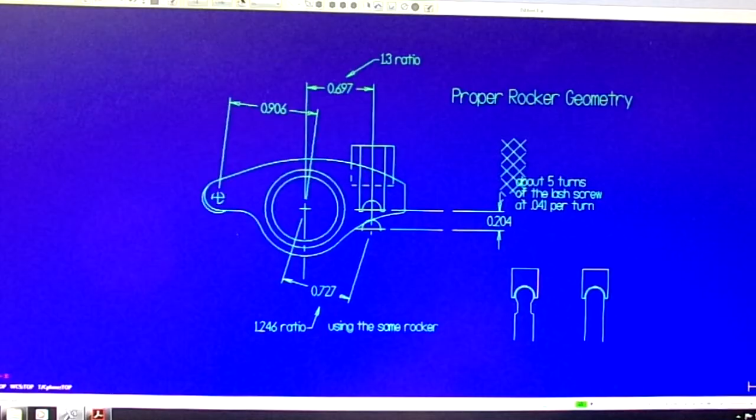So first I want to talk about the ratio of the rocker and how you can inadvertently change the ratio by misadjusting the lash screw. Now the ratio is created using this fixed number, which is a dimension from the center of the trunnion to the center of the roller. In the GX200, that happens to be 0.906.

And in this particular case, I'm using a 1.3 rocker geometry here, which means the distance from the center of the trunnion to the center of the ball on the push rod needs to be 0.697. That gives you a full 1.3 ratio.

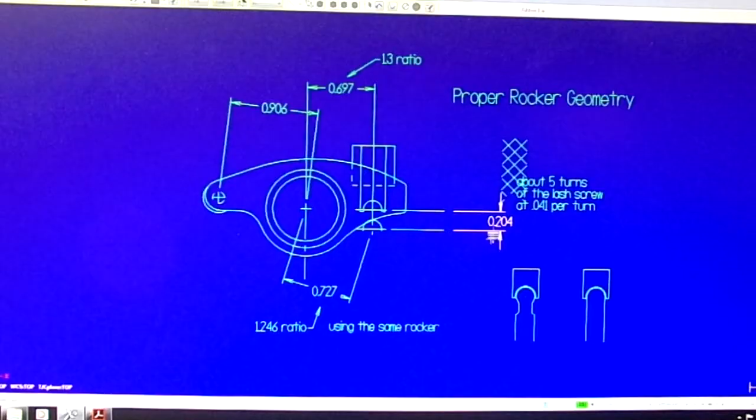Now, if your push rod is too short, you have to run this screw down. You see this piece of geometry here? If you run the screw down to this level, which is about 5 turns of the screw, that'll bring you down another 204 thousandths. So if your push rod is 204 thousandths too short, this lash adjusting screw is going to end up down

here someplace. And when you do that and take a measurement from the center of the trunnion to the center of the ball, you end up with 0.727 instead of 0.697. And when you calculate the ratio, that actually works out to a 1.246 ratio instead of a 1.3. So adjusting the lash and using the correct length push rod is key to this.

Now, how do you know how short or how long your push rod is? Well, the GAGE rockers are designed so that if the bottom of the screw is flush with the bottom of the rocker, it's about correct. Actually, it's designed to stick out one thread. So if your lash screw is flush with the bottom of the rocker to about one, maybe 1.5 turns sticking out the bottom, then you have approximately the right push rod length.

The difference is going to be minimal as far as the ratio goes, but for the perfect ratio, 1.3, the screw should be sticking out about one turn, one complete 360-degree revolution of the lash screw.

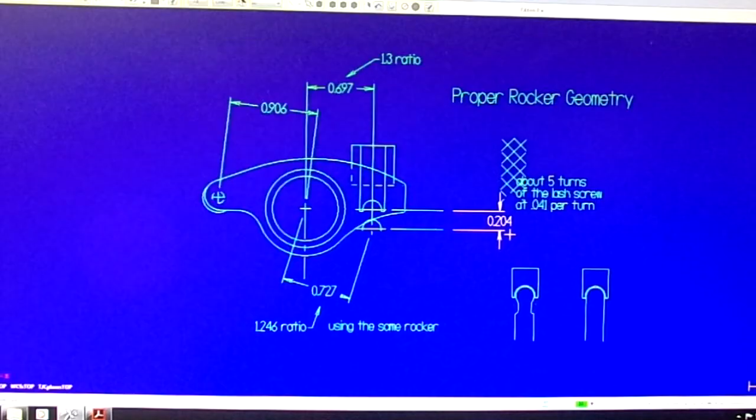But again, if you're sticking out 5 turns, you're down to 1.24 ratio, maybe 1.25. So that changes your ratio and definitely affects your performance. Not to mention, if the screw is down that far, your chances of popping a push rod out are pretty significant. You'll probably end up losing that push rod. It'll pop out, get caught on something, bend, and you'll be a disappointed racer that day.

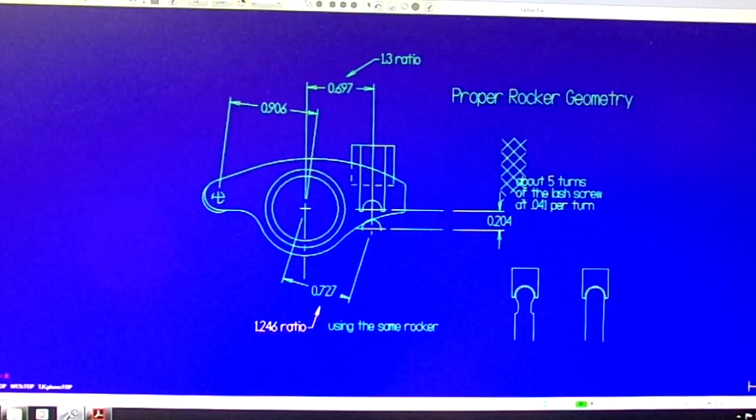So now we've covered the type of push rod we need, and we've covered the way you can inadvertently change the ratio of a rocker. So let's scroll down here and let's talk about how to adjust the stanchion. Now the stanchion is what holds the trunnion up. There's 2 bolts that go through that and mount to the head.

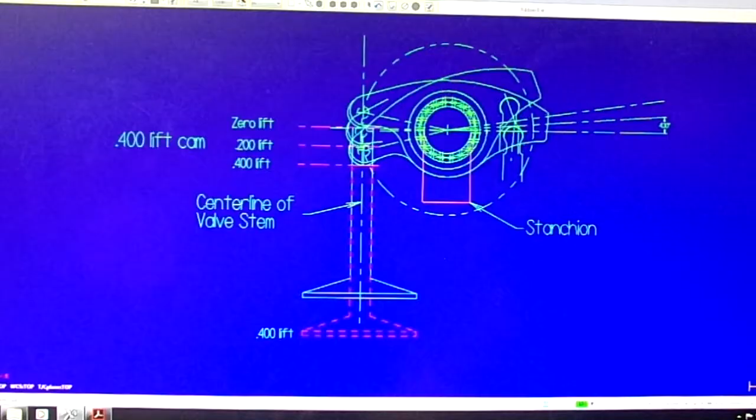And this section here, these 3 lines here, represent the stanchion, and it kind of sits around the trunnion. There's a radius cut into the stanchion that the trunnion sits in. So this is a diagram of the movement of a rocker using a 400 thousandths lift cam. Now every cam is a little bit different, duration's a little bit different, how the ramp works is a little bit different on each cam. So we're going to talk about how to use this process on various cams, but I just chose a 400 thousandths lift cam for the purposes of this demonstration.

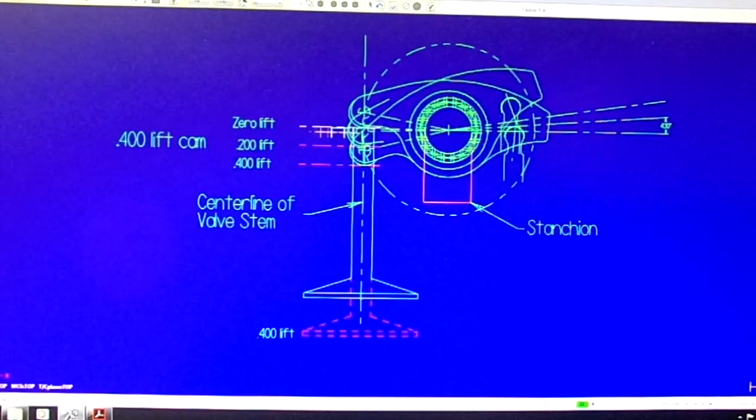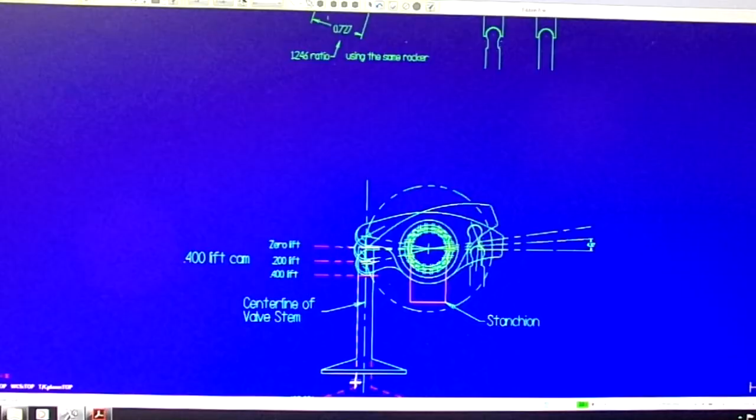If you look at our valve, the valve stem ends here when the rocker is at full closure of the valve, and we'll call that 0 lift, and that's where, and I'm going to zoom in on this, that's where the roller actually makes contact with the valve stem, or if you're using a lash cap. Alright, this line here is the center line of the valve stem, and should be the center line of the entire valve, including the ground surface.

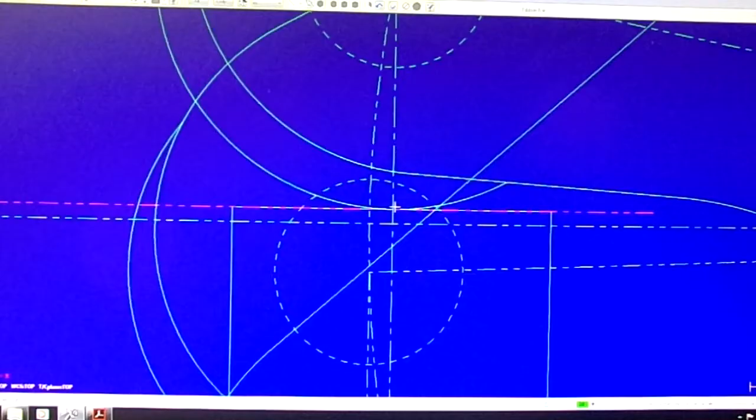So if we started off with the roller touching the valve stem, and if we zoom in on this, you're going to see it's going to be touching the valve stem right at the point of the center of the valve stem, and that's where the roller actually makes contact. But if you look at what happens when this roller rocker starts to move, this circle here represents the arc that it is going to travel as it depresses the valve.

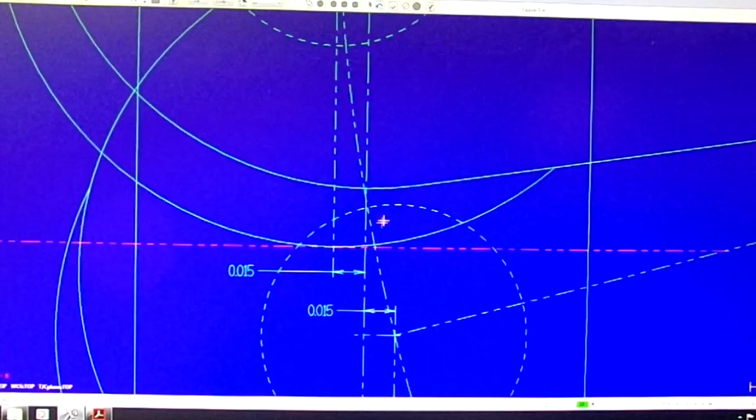At half lift, or 200 thousandths lift, this line here being the center line of the valve stem, and this line here being this contact point, you'll see that it moved forward of center by 15 thousandths. And as the rocker continues on its journey down to 400 thousandths, which is where we are here, the contact point now is 15 thousandths behind center. And that happens when you have the correct stanchion height.

Now the way I can check this very quickly on an actual engine is to take some black magic marker and just mark up the top of the valve stem or the lash cap. Put your rockers on, put your push rods in, set your lash, and then manually run the engine through a couple of revolutions. And what will happen is you'll end up with a little wear mark right in the black magic marker. You can look at that wear mark. Does it look like it's in the center of the valve stem or the lash cap?

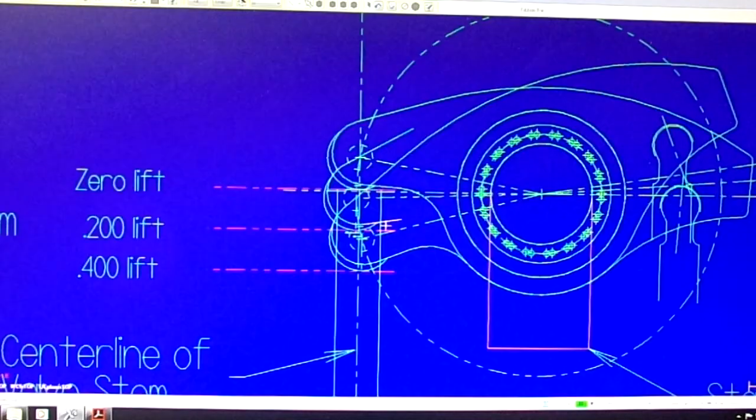And if you're very close to the center, your eye can actually see if you're 10 thousandths off or 20 thousandths off; your eye can probably see 10 thousandths if you have a decent eye. Because the stem is so small, a slight misalignment will show up very quickly in that black magic marker. But if you're approximately in the center of that valve stem, you're good to go. But let's say you're on the back side, meaning this side here of the valve stem. So what do you do? The way to change the location of that wear mark is to change the height of the stanchion, which holds up the trunnion.

Now, if you use a taller stanchion, let's say you shim this, and if you do shim, you have to shim both sides equally, and when I say equally, within 2/1000ths of an inch. So if you're going to put washers underneath the stanchion, you want to use a micrometer to measure both of those spacers to make sure they're within 1 or 2/1000ths of an inch of each other. I think the maximum this will tolerate is about 3/1000ths of an inch.

So now what happens if you raise, let's say you shim the stanchion, what does that do to the wear mark? Well, what it's going to do is it's going to move the wear mark closer to the rear, this being the rear. So it'll actually move that wear mark over in this direction. If you machine the bottom of the stanchion off, and if you do that, make sure you machine exactly the same amount off of both, what you'll do is you'll move the wear mark closer toward the front of the stem in this direction here.

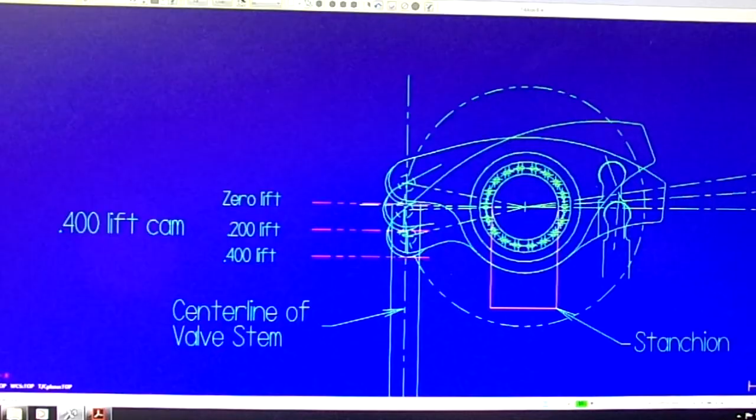Now, once you have this height correct and your wear mark correct, now you go back in, put your push rods in, set your lash, and then see where the screw ends up. And then you can start counting your screws. And I'm going to go back up to here and repeat what I said earlier. You can start counting the turns on the screw until the bottom of the screw is flush to sticking out one thread.

When you count those number of turns, let's say it's 2.5 turns. If each turn is 41 thousandths, 2 turns would be 82 thousandths, and another half a turn would be another 20 thousandths approximately. So you're talking about 102 thousandths is what you need to make the current push rod longer. So whatever that old push rod measures, add the 102 thousandths to it, and then have a push rod made for that side exactly that length, and then you'll be right on the money as far as getting the correct geometry for your rocker.

Now, a lot of people just use the same size push rods on both sides. That may or may not be a good idea. If you have one valve that, let's say you recut the seat and now it's sticking out another 10 or 20 thousandths, you're going to need a different push rod length for the other side. So it's always good to mark your push rods, exhaust and intake, because each side may not be the same. They could probably be within 20 or 30 thousandths of each other and we're okay. If one side is flush and the other side is sticking out one thread, you're still good to go, because being that close to flush is not going to make a real big difference in your ratio.